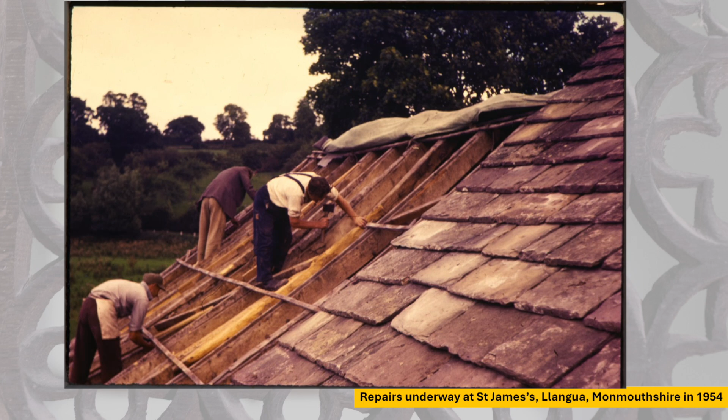So these are some of the repairs that went on. You can see there's the medieval timber roof, and they're adding some more bits to it. And you've got the stone roof going on there. I'm not entirely sure who this chap is. I wish I did. But we are very lucky to have some photos of those 1950s repairs going on. So Ivor repaired the church in Dilys's memory.

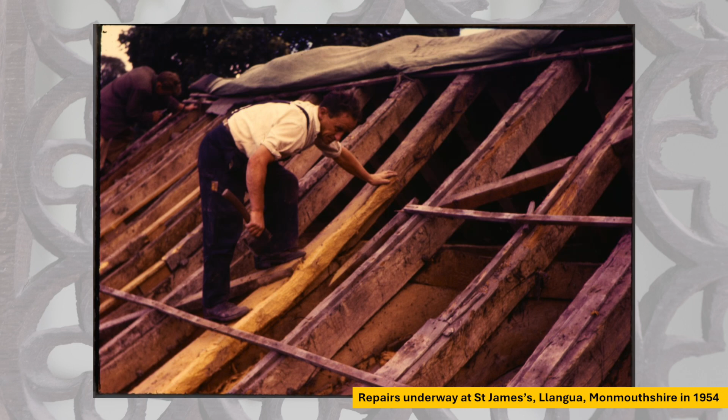And the minute you open the door, the first thing that you see in the church is this monument that he had commissioned for her. It's black and gold leaf and a Latin inscription. So yes, the minute you open the door, that is what you see. That is what he wanted you to see the minute you opened that door.

So this is St. James's as it is. We got here in 2019. We were contacted by Hereford Diocese, and I think it was down to about 2 members of the PCC, and it's right in, you saw at the start, right in that bend in the river, so it floods a lot.

And basically, they just felt that there wasn't a need pastorally for the church anymore. So the diocese contacted us, and we called in Andrew. And Andrew did a condition survey, and unfortunately, it wasn't...

Oh, golly, what am I doing here? That is not what I wanted to happen. Unfortunately, it wasn't in the best condition. I will come back to the condition in a second. My slides are a little bit out of order, so I'm sorry.

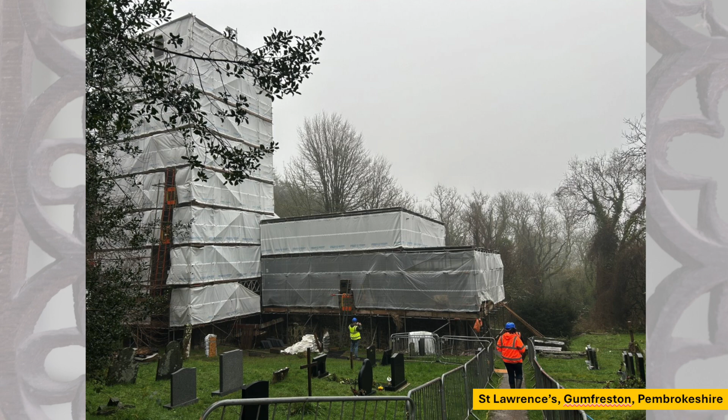But yes, it wasn't just in the 70s that churches looked in dreadful condition. So back to St. James's. That was in dreadful condition too. So we were approached about it in 2019. Andrew did a condition survey, and we had thought it would be a really straightforward thing.

You know, yes, this church has really important connections to our founder. Off the back of that church, he went on to found an organisation, the first organisation about conserving redundant churches, preserving redundant churches. So ultimately, he changed the fate of churches in England and Wales through this church.

But Andrew did his report, and it wasn't great news, really, I have to say. Obviously, lots of nice structural cracks, huge problems with the roof, which Andrew will go into in much more detail than I am. I'm just going to show you some scary photos.

So yes, for me, the main thing was when Andrew rang and said the wall plate on the north side has moved out so much that there's only about 20 millimeters of bearing. So I think we should get somebody in to prop it pretty soon. So we did. So we were a bit worried about that. That's some of the propping that we installed.

It took a long while to get things going for various reasons. Golly, I mean, issues with the local authority, one thing, but also funding. It was going to be a really expensive project, and how were we going to manage it? About the Friends, we're a small organisation. There's 3 of us, 3 staff.

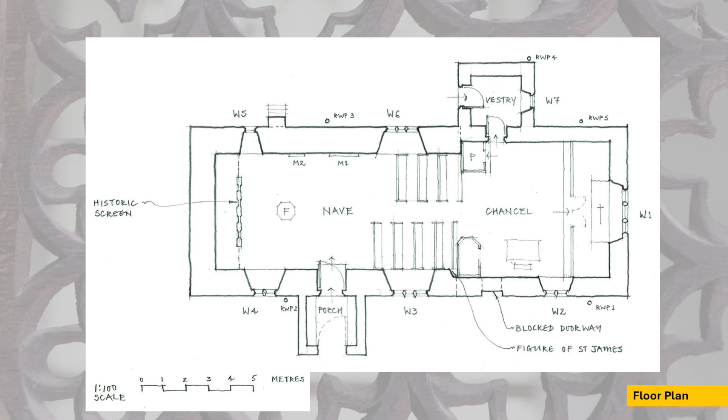Have most of you been to the building? Do you know it? You have. Well, many of you haven't been.

Okay, that's interesting. So the interior is presented very much, the bones of it are ancient. The walls you see now you wouldn't have seen traditionally. They almost certainly would have been plastered and lime washed. But the ceiling is probably the most characterful part of the building and is what's so special about it, in my view. The fittings are mainly later.

Well, they're all later, but some of them are older than other parts. The pews are actually quite late. They're part of the 1950s work with Ivor Bulmer-Thomas. But the pulpit and some of the desks are earlier. They're maybe 17th century, and the altar too. What else have we got?

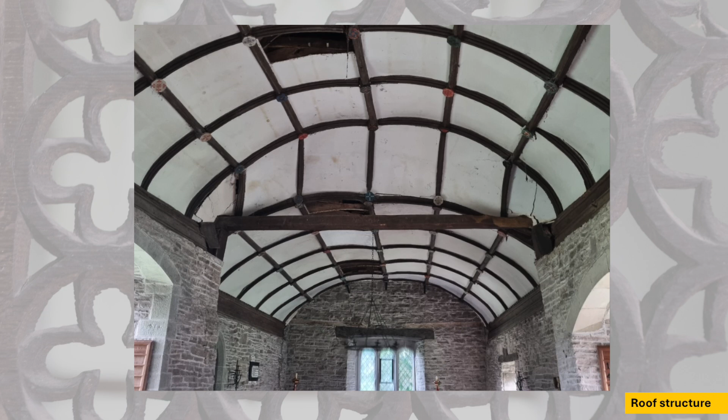Okay, so the roof structure. So we've got this wagon roof here in the nave coming down to this point, and then another wagon roof in the chancel. And then unusually there's this sloping section in between. And this was where the worst of the problems was revealed.

So this beam was added probably in the 17th century, maybe 18th century. And presumably, we're guessing that was to do with tying the structure together. So we imagine there were problems even at that early time. But here you can see quite significant cracks on either side. And these were the real telltales that there was something going on.

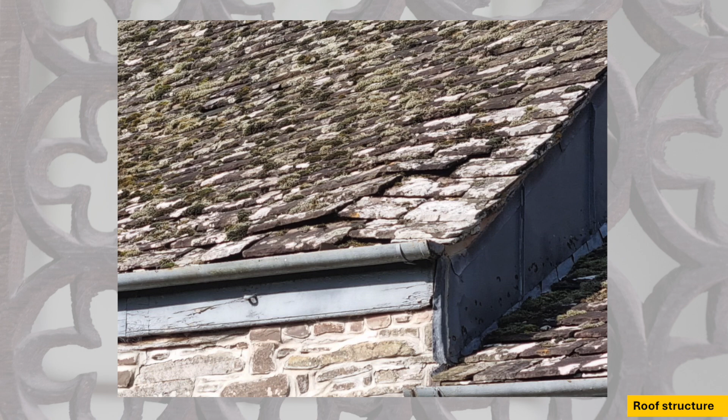And on the outside, it was quite clear with the amount of movement here. This is just above the same place. You can see that the tiles have been lifting here. And what's actually happening is there's a huge dish in this part of the roof, and then it's rising up just over the gable. Well, not over the gable, over the supporting structure at the end there.

There's a couple that are missing at the west end, and that's because some steels were put in there to support the bell cote. Possibly in the 50s. I'm not sure if that was part of the Ivor Bulmer-Thomas work.

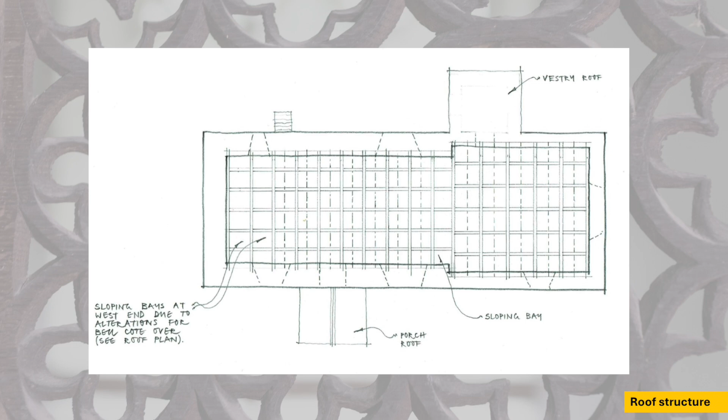So I was just saying the worst of the problem is in this area, or the most evident problem is in this area. But actually we found out that almost every truss that we got to had failed structurally. So again, just pointing out these two locations where the cracks in the plaster were found and are still getting worse.

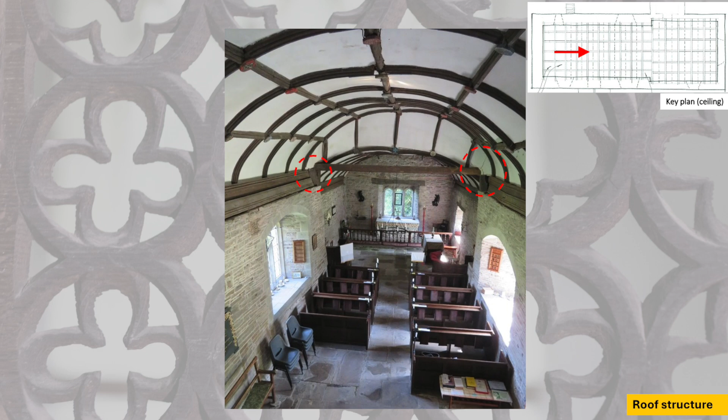So I arrived in 2019, and I was given previous reports on the church where people had seen it for years and years and said, yes, these cracks are here, but it hasn't got any worse. But I was slightly nervous because I could see some old photos and I could see what it looked like now. And it was getting worse, without a doubt.

And one of the telltales actually was the shape of the ceiling. So it should be a wagon ceiling. It should be a barrel, effectively. But if it's coming down in the middle, we know we've got quite a significant problem. And you can see that the panels, these are later plaster panels. The early ones were lost prior to the 1950s.

And so these are modern, quite lightweight plaster. But you can see they're deflecting in here. So there's quite a lot of movement going on. And they put brackets here to support the ends where they were no longer in contact with the wall.

So here's a couple of sections to try and explain how the roof structure works a little bit. I'm no structural engineer, and I'm sorry our engineer isn't here tonight, but I'll try and talk through just some of the principles of what we think is going on.

So unlike later trusses, you have trusses at very regular centres, as you'll have seen on the plan, and it's at the top there. So there aren't any purlins supporting the rafters. The trusses actually support the battens, which then hold the roof tiles. So it's a very simple structure in that sense.

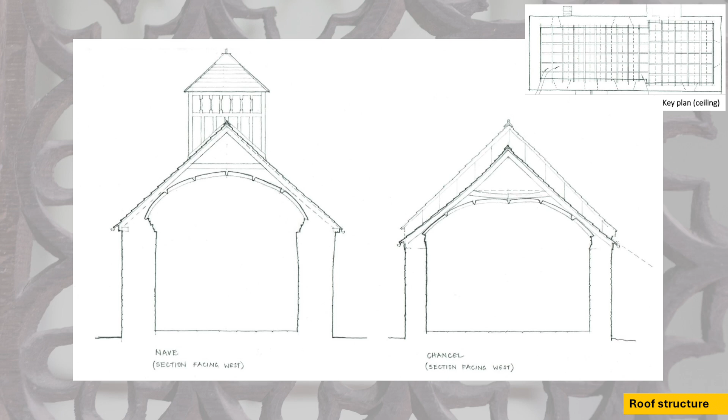Oh, there we are, that's easier. So the principal structure is a sort of A-frame. But what happens is these tend to bend because there's an additional weight on there. We think the church may originally have been thatched, and obviously a stone tile finish is going to be much, much heavier. When you consider that the stone tiles are lapped and they're an average of about 1.5 inches thick, you've got an average of at least 3 inches of stone on the top there, across the whole of the roof, which is a huge weight.

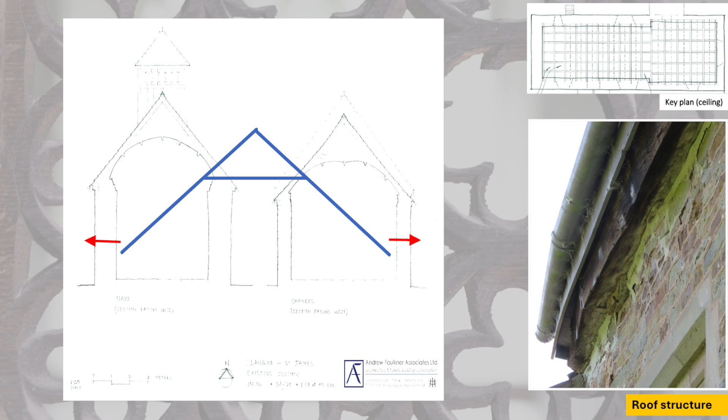But as the principals bend, you tend to get outward movement pushing out, and that's very clear. What's happened is the wall plates have moved outwards, as Rachel mentioned earlier. So we've got inner wall plates here and outer wall plates, and everything's moving outwards. So the outer wall plate tends to move off the wall head, and certainly on this side, it actually moved to the point where it was barely even touching the wall. And the inner wall plates have rotated because they've been pushed.

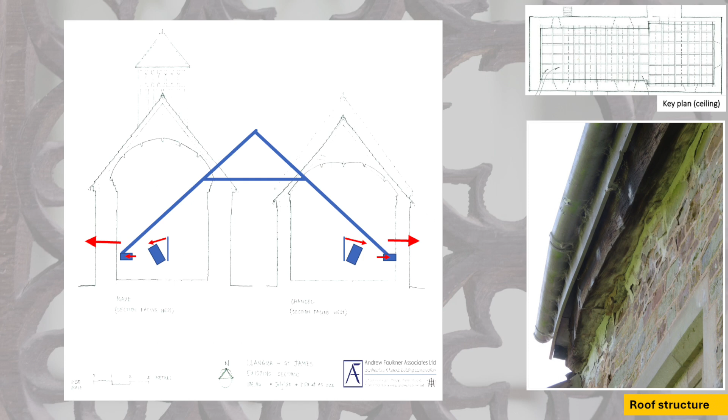They're very large, actually, and beautiful and carved. And in fact, on one side, I think they're in a single piece the whole length of the nave, which is really quite remarkable. But relatively unusual, I think. I haven't come across it before.

So these two wall plates are tied together, but what's happened is the outward pressure here and the rotation has actually caused pressure going both ways, so that the walls have actually cleaved. And if you think about the way a traditional wall's built, they tend to be built with a solid face on one side and the other side, and then with relative sort of infill in between, although there are bonding stones and ties. You do tend to have this sort of splitting quite possible with that.

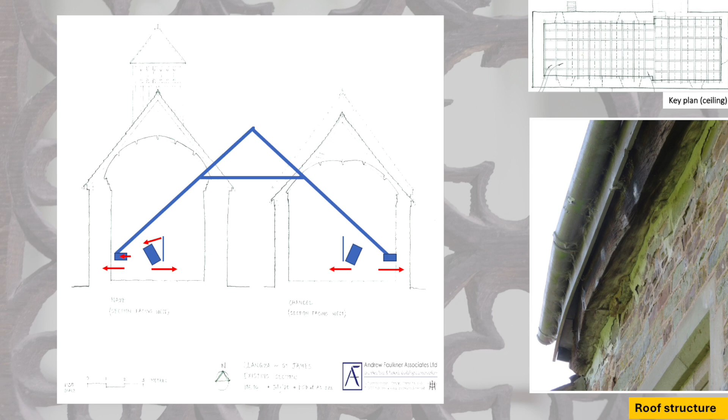And you can see it there. This is my approximation of the shape of the wall. But we'll come to some photos which show it better. But actually here on the right, you can see this is the wall plate that should have been sat right on the wall, but it's pushed out and it's actually taken quite a lot of this stonework with it. And seeing it today, it's a lot worse than that, actually.

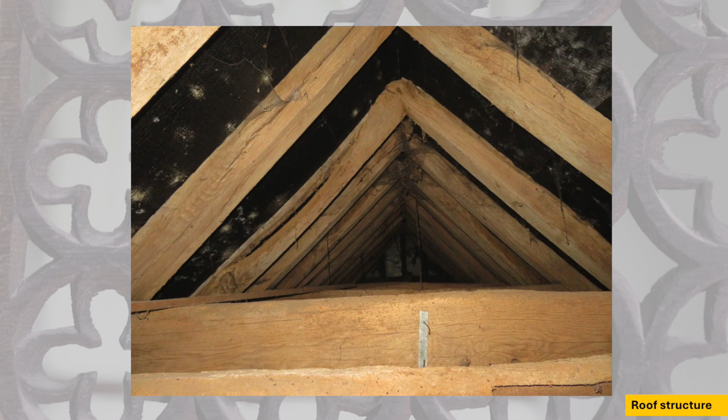There we are. So we got up in 3 places inside when we investigated the structure. But unfortunately, we couldn't crawl through. I'd normally just crawl straight the way through and investigate, but it was far too dangerous to do that. We found that just about every single truss had not just minor problems, but really major problems with it. So many of them have broken on the principal, where the principal joins the collar, but also the collars have split in places as well.

This is actually one of the 1950s repairs, which is to try and rehang the ceiling from that tie. I don't know if it's clear from the image, maybe from further away. But this is one of the molded arch braces, which is part of the ceiling structure. And that should be fully engaged with this timber, but it's dropped out. So they've hung it in position, but that's very little support. And it's not really giving the support to the roof structure that it needs.

On this side, this is really to show some of the decay. So this is the full section of timber. And obviously when we get to here, there's nothing left at all at the junction. So the roof works entirely sort of codependently. It needs all the parts of the structure to be working together to make it work properly. And once these junctions break down, it becomes very difficult for it to carry the loads.

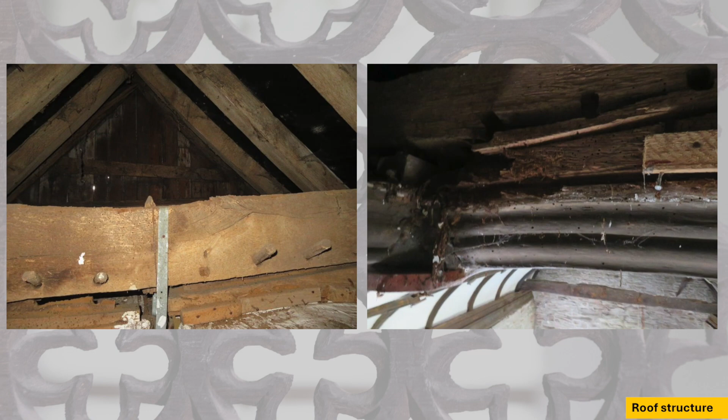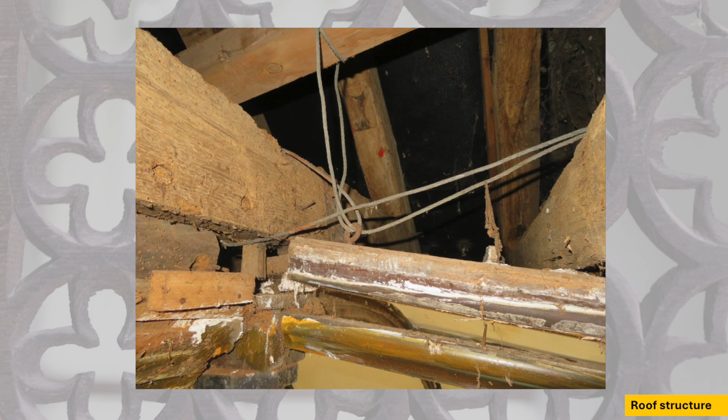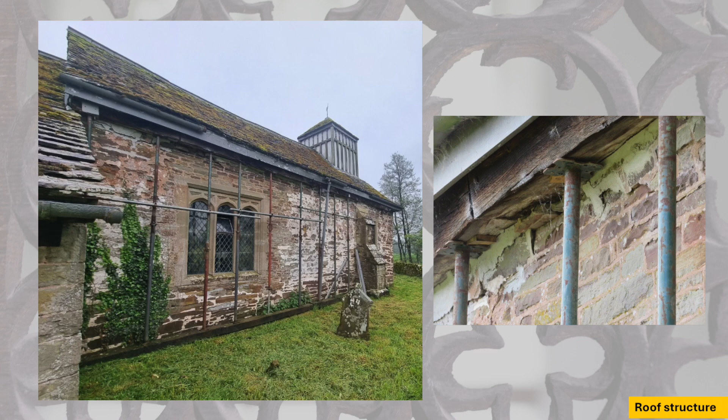So the challenge was to decide what to do with the roof, and what the engineer wanted to do and what we wanted to do was to take off the stone tiles and put a lighter finish on. That would have enabled us to do the minimum repairs to the timber structure, which is really the most valuable part of the craftsmanship of the building in our view. Unfortunately, after a couple of years of battling with the local authority, we realized we weren't going to get anywhere with trying to put a lighter finish on. So we had to accept that stone tiles were going to go back onto the roof.

So we had then 2 further options. One is to put an independent steel structure within the configuration of oak work with the oak trusses, and to effectively hang the roof on a new structure, re-support it completely. But that's technically quite challenging. It's also bringing a lot of weight into the building. And because of the deflection of all the oak timbers, some of which have deflected one way and some of which have deflected the other, trying to design a new structure to go within that is a really complicated thing to do.

And actually what we decided is we'd prefer to make the oak structure do the job that it was originally intended to, still carry the loading of the roof, but to give it all the help it needs to do that. And unfortunately, in some ways, that's even more complicated than putting an independent structure in. But what it does mean, and I think this is fundamental from a kind of philosophical point of view, it means that the oak structure will be fundamentally doing its structural job.

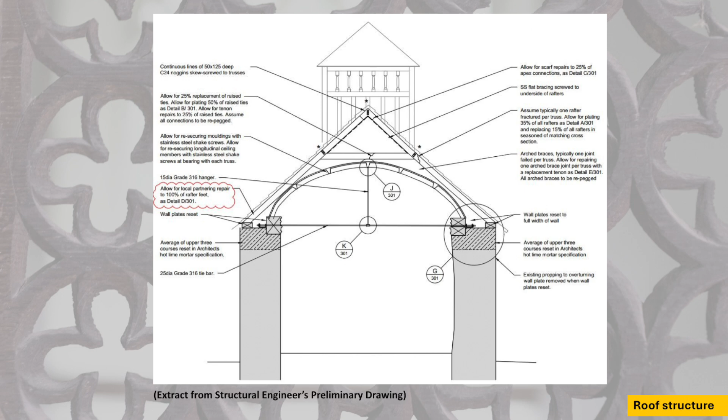But we will be repairing all of the ceilings, all of the trusses, and putting lath and lime plaster back in. So it will have its full traditional appearance, which will be really exciting.

I want to talk a little bit about the walls as well. So this church was originally built with an earth mortar with some lime mixed into it, a hot lime mix as we would call it now. And the lime gives a little bit of strength to the earth, to the clay, but that's a really wonderfully soft and permeable mix. Then usually on the outside, and is the case here, there's a richer lime mix used for the weathering elements, so the pointing, and then probably a lime wash or a render. We'll come on to a little bit more detail now.

And then over the top there's a lime slurry or a sort of render coat, which is actually very thin, not like we would think of render now, being maybe 1 inch thick. It was a very, very thin skim, effectively, applied by hand, and then a lime wash finish, which gives additional protection. And then the lime wash would be reapplied, maybe every 3 or 4 years, to help keep the water out.

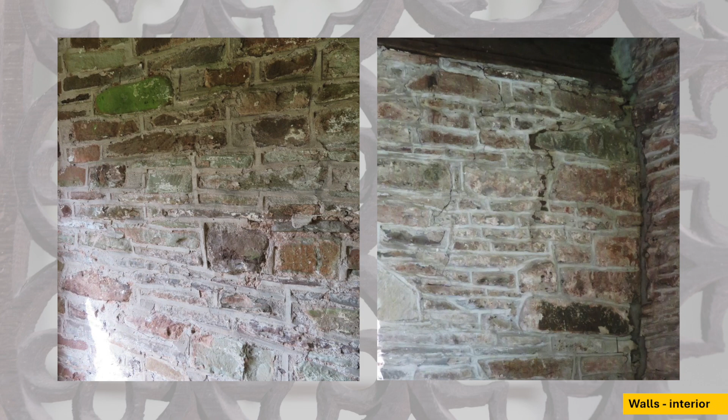So some structural cracks on the right. This has been happening largely, we think, as a result of the movement in the roof, despite the walls being up to 4 feet thick in places. There have been cracks occurring for a very long time, and the outward spread of the walls, because of the outward spread of the roof, has been quite significant. On the left is just some of the cement pointing. That's actually in the porch.

This is in the chancel at the east end, where the walls were a bit thinner actually, but you can see a structural crack has been opened up and filled, and another here over decades. So we will be doing some structural anchoring through the walls from the outside in order to just stitch across those.

And really excitingly, the Friends have commissioned the building's archaeologist to do what's called a level 3 record of the building. So that's a reading of the building from an archaeological perspective to try and understand everything we can read from it, but also documentary research, finding as much information as we can possibly get and putting it together so that we get a really good picture of as much as we can possibly glean. And now's the time to do it while we're really exposing every part of the building through the works.